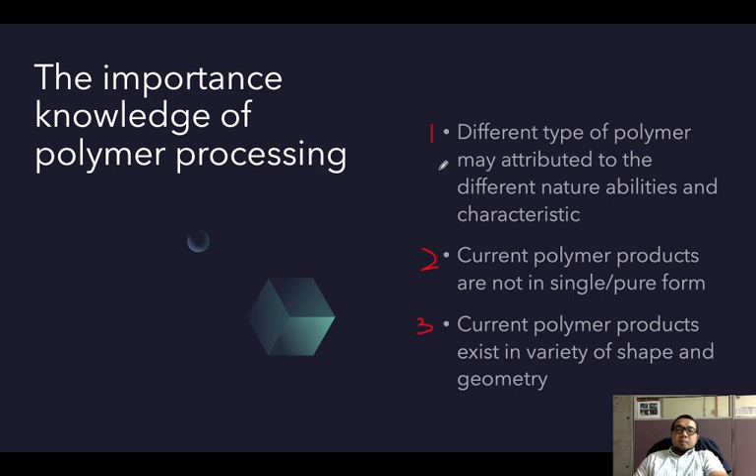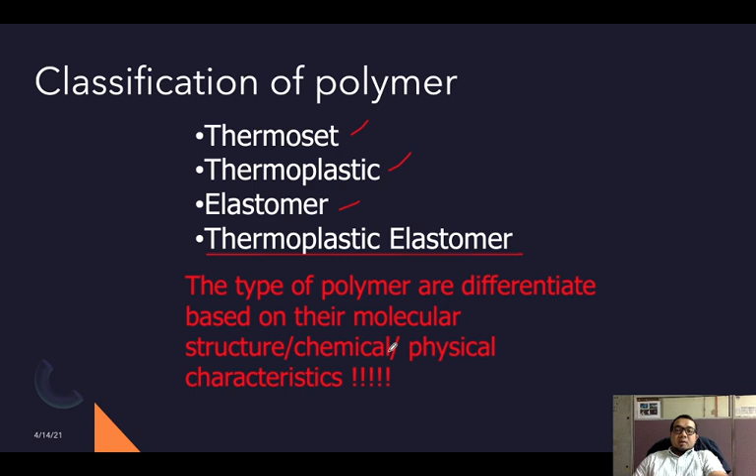So this is the recap. The classification of polymer can be divided basically into three: thermoset, thermoplastic, and elastomer. The thermoplastic elastomer is under the elastomer type. The type of polymer are differentiated based on their molecular structure, chemical, or physical characteristics.

Firstly, we go to the compounding process. Compounding is the process of incorporating additive modifier into polymer for achieving uniformity on a scale appropriate to the quality of the article subsequently made from the compound.

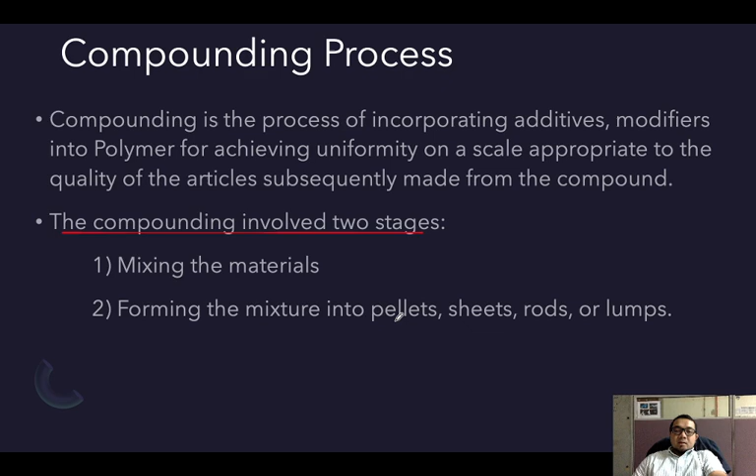The compounding involves two stages. One is mixing the materials. The second one is forming the mixture into pellet, sheet, rod, or lumps.

For the compounding process, there are four basic methods. First is dry mixer, which is ball milling, batch mixer, internal mixer, hot or cold two-roll mill, etc. Continuous mixer, pultrusion and filament winding, screw extruder, single screw or twin screw extruder. This is the basic method for compounding process.

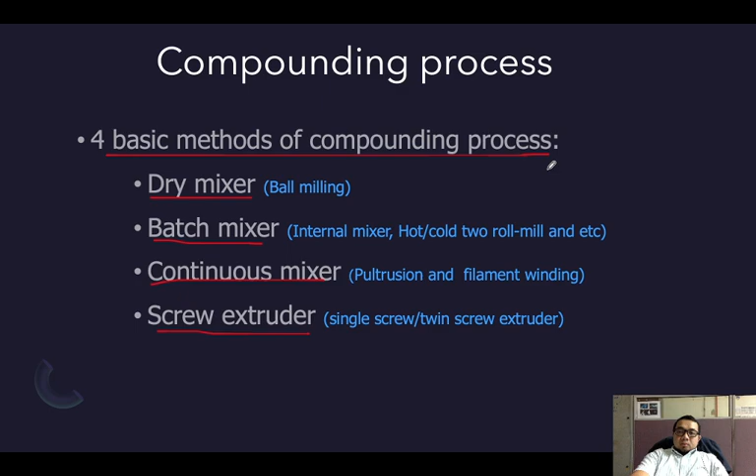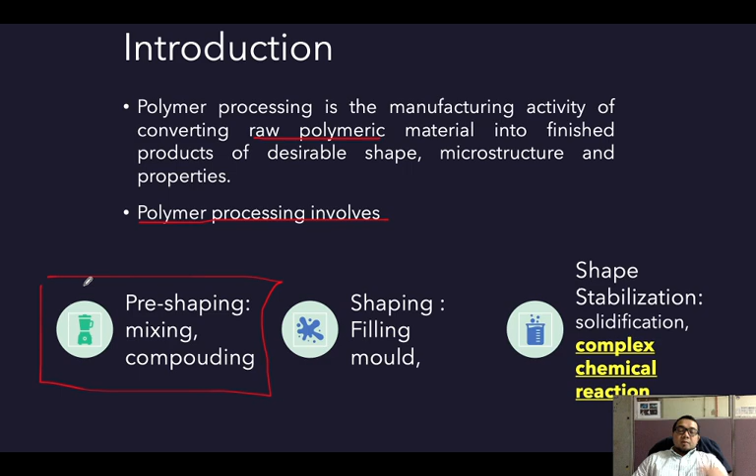Compounding process is more like a mixing process. As I mentioned, this is pre-shaping, the first step, which is mixing and compounding.

For end result and justification, we can get two types of compound specimen: bad compounded specimen and good compounded specimen. Let's look at what is bad compounded specimen, where the mixture is not nice, bad.

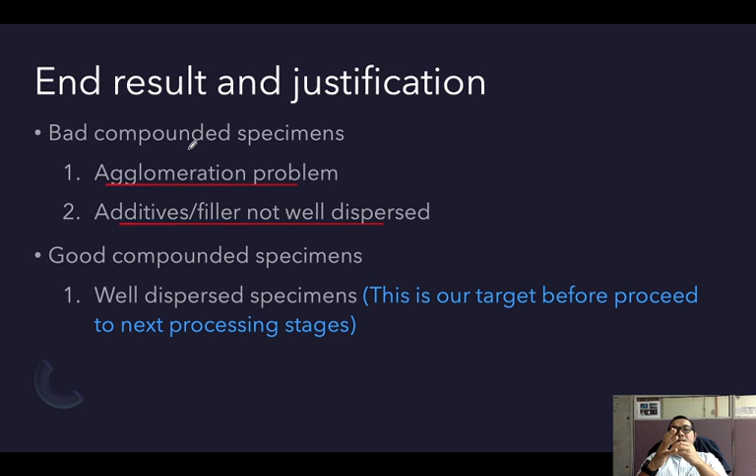First is agglomeration problem, and the second is additive and filler not well dispersed. Agglomeration means you mix two types of material, the matrix which is your polymer, and the filler. The filler becomes clumped, meaning it sits in one place, it agglomerates.

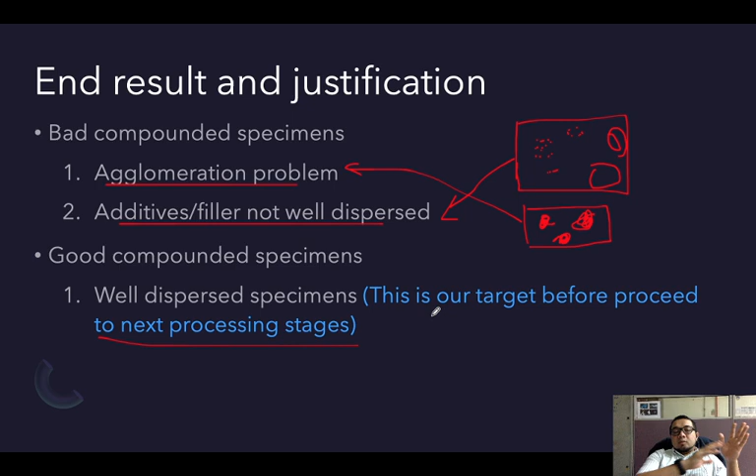And then what's called good compounded specimen is a well dispersed specimen. This is our target before proceeding to the next processing stages. Once we mix well, then we can go to the next process.

For variety of polymer and polymer processing, there are two basic types of polymer: thermoset and thermoplastic. This is a recap from last week. A wide variety of plastic manufacturing processes exist.

First, extrusion, which is expansion, lamination, calendering, solid phase forming, thermal forming, casting, foaming, spinning, molding, compression, transfer molding, blow molding, rotational molding, and also injection molding. These are among the manufacturing processes.

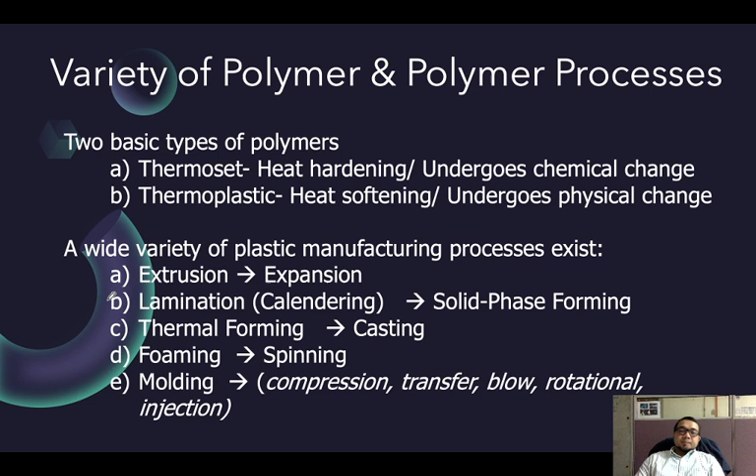So these are the common polymers: ABS, acrylic, cellulosic, nylon 6, polycarbonate, polyethylene high density, polypropylene, polystyrene high impact, PVC polyvinyl chloride rigid.

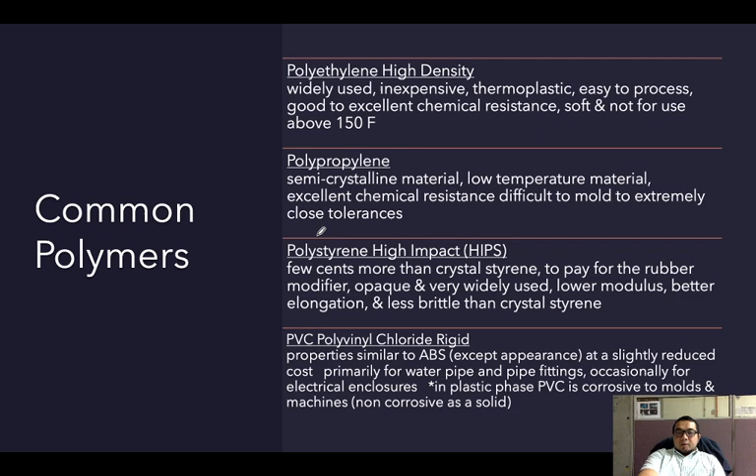Last week's class I already showed the types of material, what is polymer, common polymer, so you can check the justification back. ABS, here are its properties. And then common shaping process for thermoplastic. This can be seen for acetal, ABS, acrylic. This is the common polymer that has been used. So what is the suitable process for this kind of polymer material?

Let's take ABS as an example. For compression molding, it's not suitable. Its common shaping is suitable to be used in injection molding, extrusion, rotational molding, blow molding, thermoforming, foaming, and also calendering. So this is the common polymer I mentioned earlier, and the common shaping process for thermoplastic for this kind of polymer.

Here you can see an example. Say you want to use polystyrene. Let's look here, this is the polystyrene. So what kind of process is suitable to use polystyrene as polymer for the shaping process? If you look here: injection molding, extrusion, rotational molding, blow molding, thermoforming, foam molding, reinforced plastic molding, and also calendering.

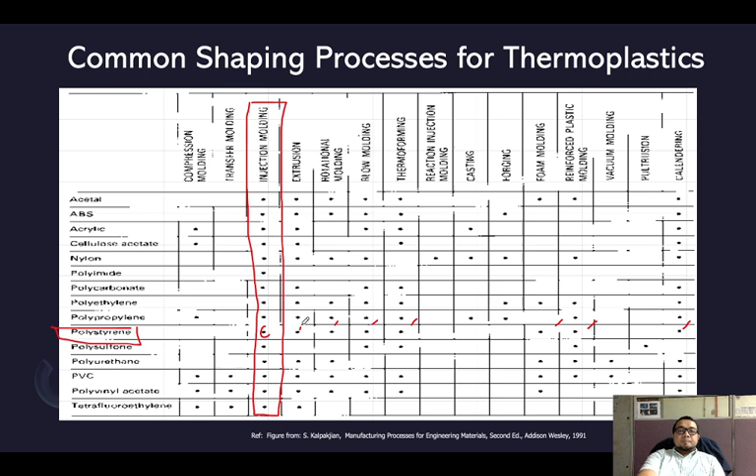And the second one is common shaping process for thermoset. For thermoset we have compression molding, transfer molding, injection molding, rotational molding, thermoforming, reaction injection molding, casting, foam molding, reinforced plastic molding, and also laminating.

If you look at the difference, the processes for thermoplastic are much more compared to thermoset. Let's take an example that's commonly used, which is epoxy and polyester. The process suitable for thermoset is rotational molding, reaction injection molding, casting, foam molding, reinforced plastic molding, and also laminating.

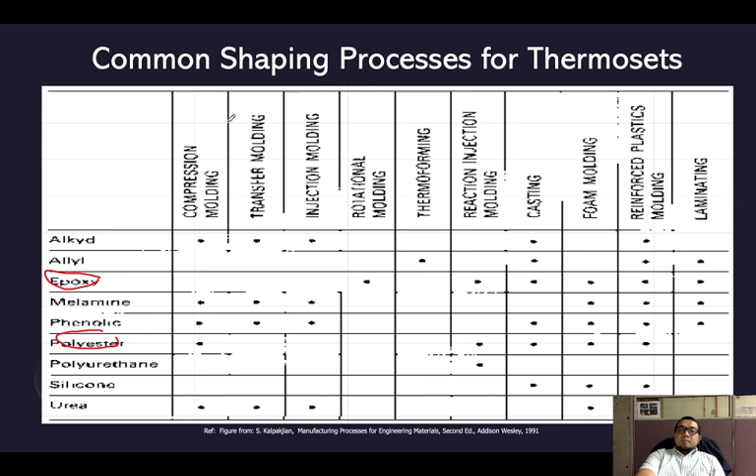So let's go to our topic today, which is compression molding. Compression molding is a processing technique that combines forming the product along with simultaneous curing of the resin by applying pressure and usually heat. So these two things are important.

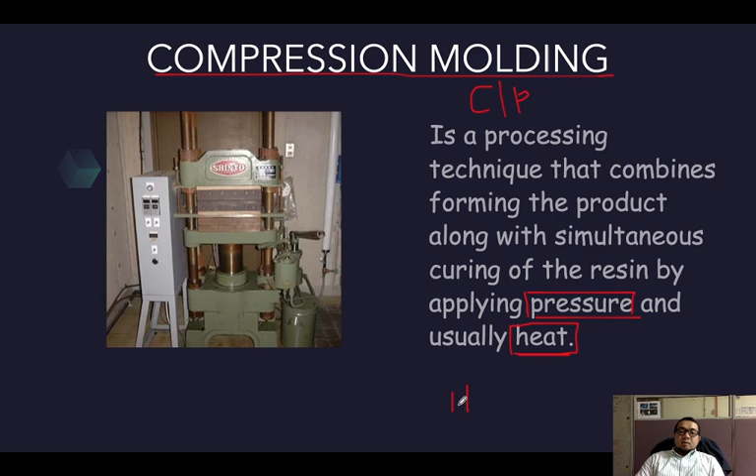There are also processes that only use pressure. In compression molding there are also two types: one HIP, one CIP - hot isostatic pressing and also cold isostatic pressing. There's CIP, there's HIP. That's why it says curing of the resin by applying pressure.

And usually, the word 'usually' is used. This means sometimes the process uses hot isostatic pressing, and sometimes there are processes that apply only pressure, not combined with heat. Basically, for polymer, usually heat is used with pressure.

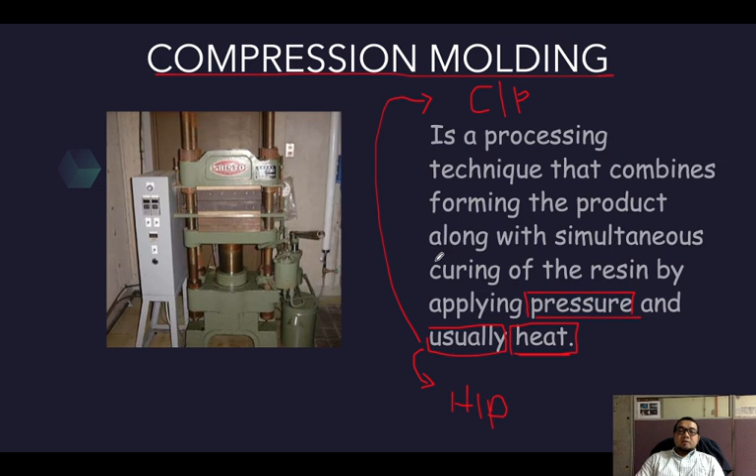So the principle for compression molding has 5 basic steps. One is charging a precise amount of molding compound into the bottom half of a heated mold. The second is closing the mold halves together to compress the charge, forcing it to flow and conform to the shape of the cavity. Third is heating the compound by means of the hot mold and letting it flow completely, filling the mold. The next is cooling, to stabilize the product. And the last part is opening the mold halves and removing the part from the cavity.

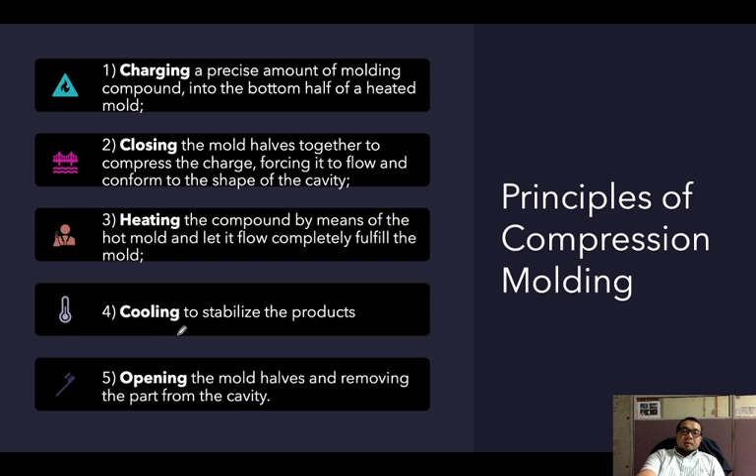Okay, next is preheating of molding compound. In practice, the molding compound, which is powder or dough, is usually preheated before it is put into the mold. So it can be powder or dough. Preheating is usually done with infrared IR heaters, high frequency HF dielectric heating such as microwave oven, radio frequency RF heating, and convection heating in a hot air oven.

So preheating converts the molding compound into uniformly softened material that flows cleanly and evenly when the mold is closed.

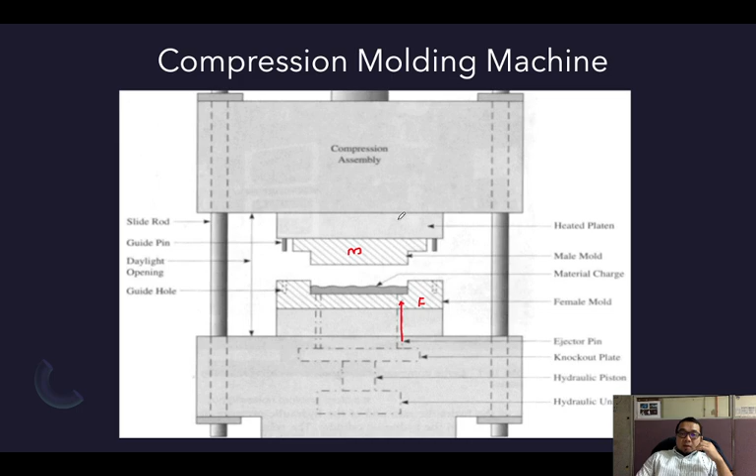From the compression molding, when the mold is closed - upper and lower, male and female mold closed - this is the preheat converting the molding compound. So when it's open, during opening it hasn't melted yet, it hasn't softened the material yet.

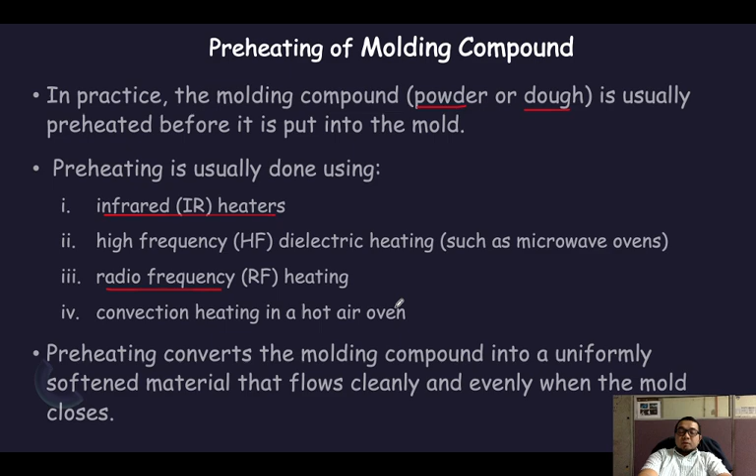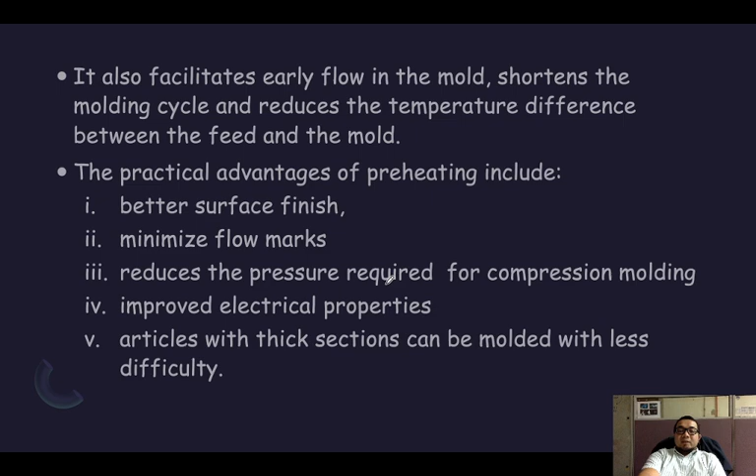It also facilitates early flow in the mold, shortens the molding cycle, and reduces the temperature difference between the feed and the mold. The practical advantages of preheat include better surface finish, minimized flow marks, reduced pressure required for compression molding, improved electrical properties, and articles with thick sections can be molded with less difficulty.

So in compression molding, the workpiece, which is a pre-shaped part, volume of powder, or mixture of liquid resin and filler, is placed in the heated mold and is formed under pressure. So from the first figure, which is charge is loaded, this is the charge, which is your material. This is the cavity, punch, upper mold and lower mold. This is the knockout pin.

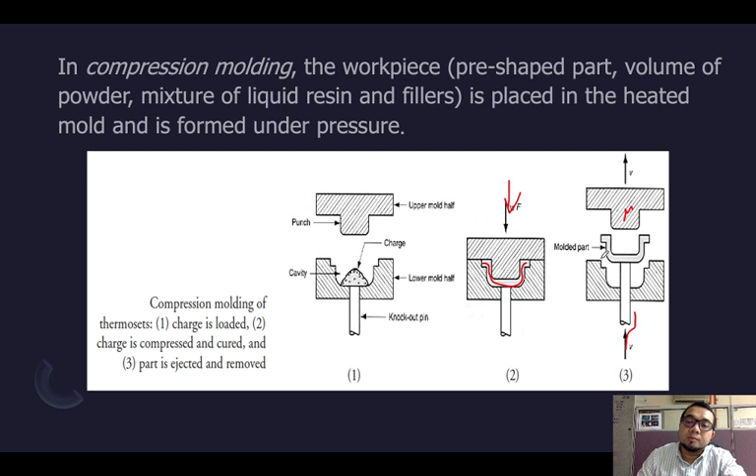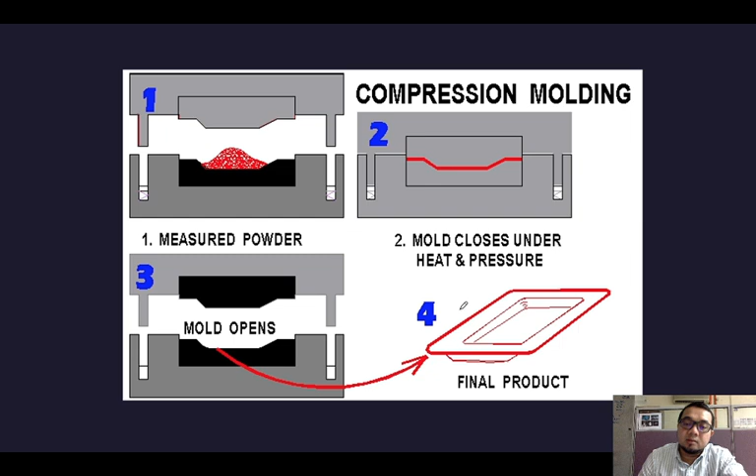So this is a basic illustration for compression molding. The first figure is measured powder. Second one is mold closed under heat and pressure, and then eject, mold open, and you get the final product. So this is the parameter that you should consider during the process of compression molding. The quantity of charged molding materials put into the mold. The second one is pressure of the molding process. Usually the range of pressure is around 2000 to 3000 psi, which is 13.8 to 20.7 megapascal.

So the third one is mold temperature. The temperature range should be around 300 degrees Fahrenheit to 375 Fahrenheit. So basically mold temperature also depends on what material you use at that time. And then the last one is cure time variable. Cure time variable is the period required to harden thermosetting material to partial and complete polymerization, called cure time. So this is the curing for the polymer.

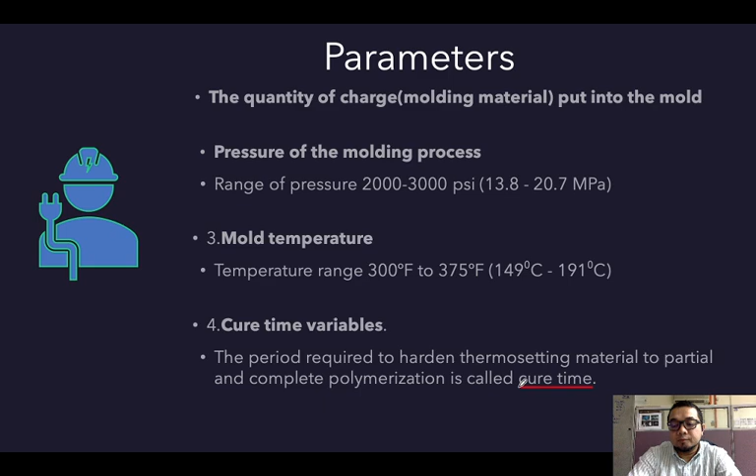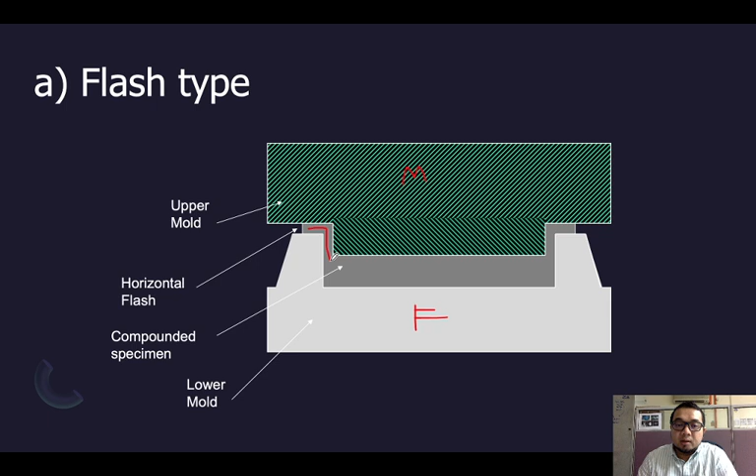So flash type is a mold in which the mold faces are perpendicular, normal to the clamping action of the press, so that the higher the clamping force, the tighter the mold seam. It is the simplified version of semi-positive mold. The flash forms the seal as it spews and rapidly cures at the mold parting line. It is the least expensive of the compression molds. The greatest disadvantage to a flash mold is that there is no restriction to the flow of material and no back pressure is built up in the molded part.

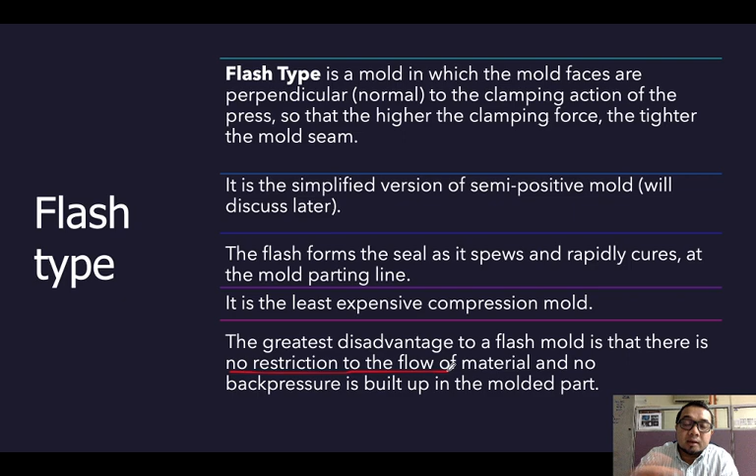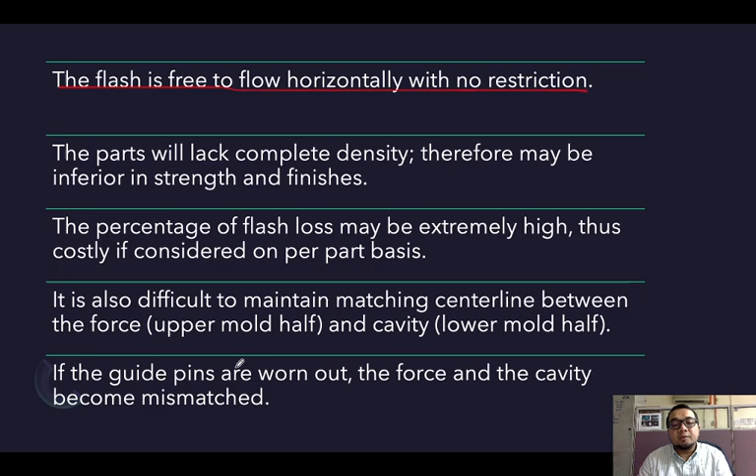So the part will lack complete density, therefore may be inferior in strength and finish. The percentage of flash loss may be extremely high, thus costly if considered on a per-part basis. It is also difficult to maintain a matching center line between the force, upper mold half, and cavity, lower mold half. If the guide pins are worn out, the force and the cavity become mismatched.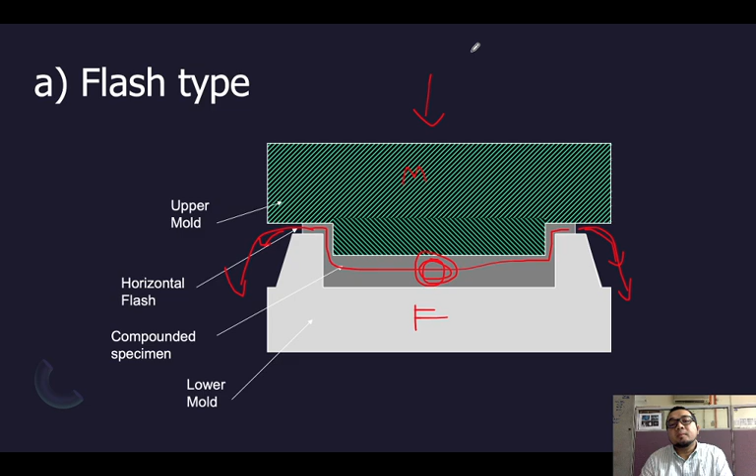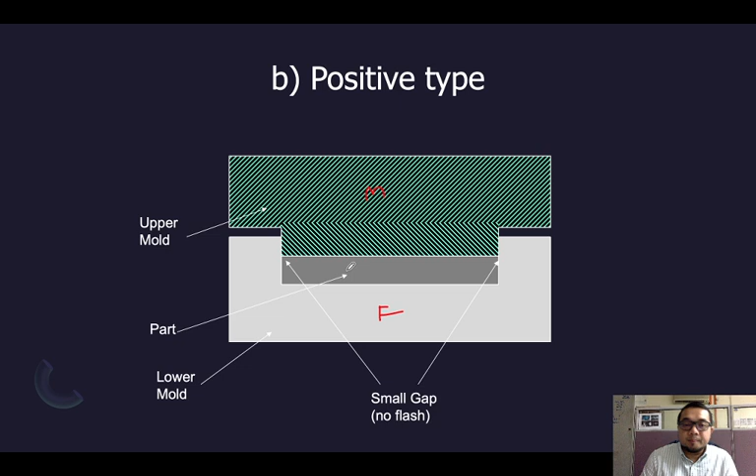Then the second type of mold is positive type. Same as well, this is the male mold, upper mold, and female mold at the lower. So this is the part, or your materials. This is the small gap.

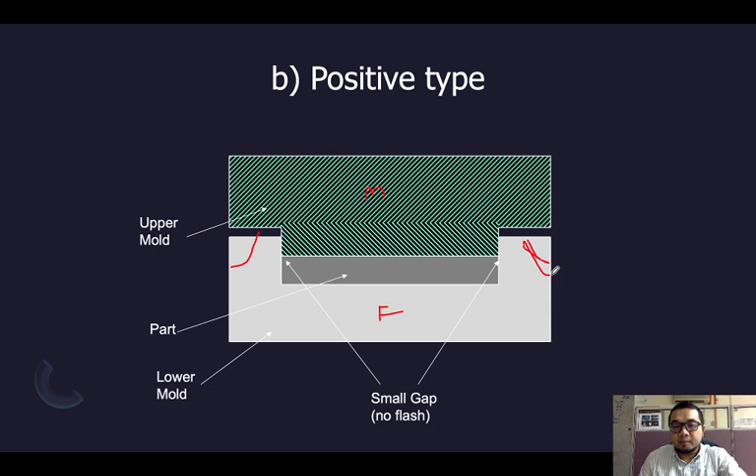So for positive type, it is a mold designed to trap all the molding material when it closes. Maksudnya dekat sini bila dia tekan, dia dah tak boleh nak access keluar. Dia dah tak ada flash. Maksudnya tak ada lebihan. Excessive flash tu dah tak ada. So positive mold takes all the applied pressure. There is insufficient clearance to allow material to escape.

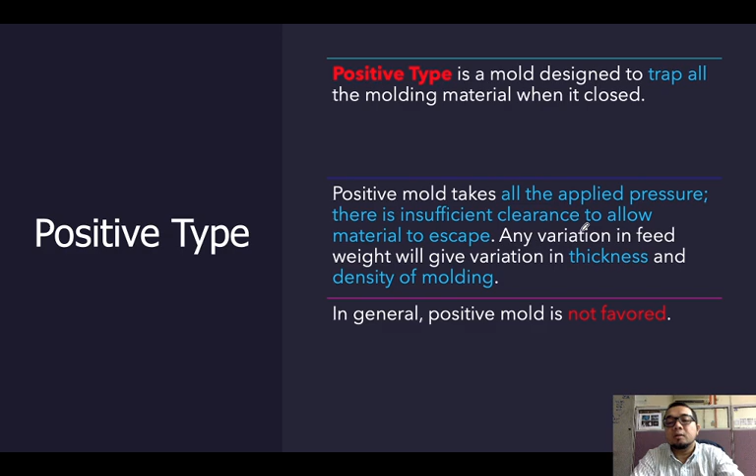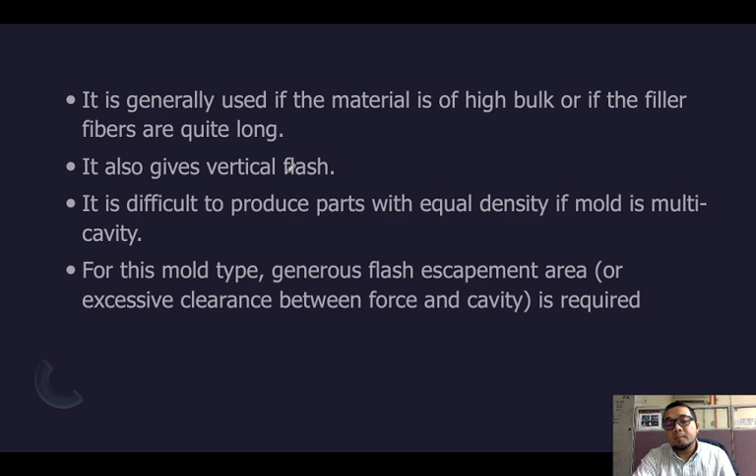Any variation in feed weight will give variation in thickness and density of molding. In general, positive mold is not favored. It is generally used if the material is of high bulk or if the filler fibers are quite long. It also gives vertical flash. It is difficult to produce parts with equal density if the mold is multi-cavity. For this mold type, generous flash escapement area or excessive clearance between force and cavity is required. So dia tak boleh nak keluar, but it will become another problem for the positive mold.

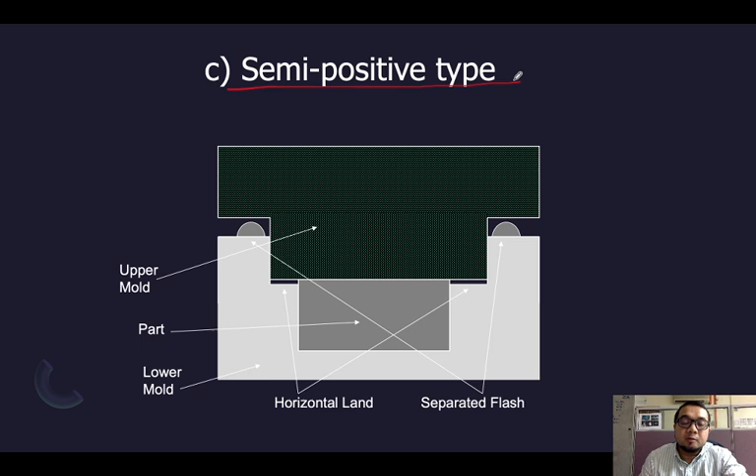Then this is the semi-positive type. The last type of mold is semi-positive. Upper mold, lower mold, this is your part. Kat sini yang membezakan dia ada horizontal land sikit, baru dia ada excessive. Yang ni separated flash. Berbeza dengan yang flash type tadi, dia terus keluar kat sini.

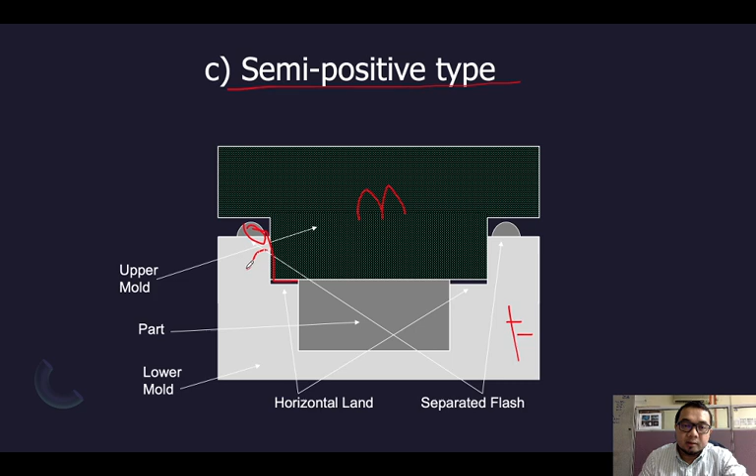So semi-positive type is a mold whose principle is, as the two halves of the mold begin to close, the mold acts much like a flash mold, as the excess material is allowed to escape during loose fitting plunger and cavity. This one, this is the plunger. So as the plunger goes further into the cavity, the mold becomes a positive mold with very little clearance, and full pressure is exerted on the material, producing a part of maximum density.

This type of mold takes advantage of the free flow of material in a flash mold and the quality of producing dense parts in the positive mold. So the majority of compression molds are semi-positive horizontal flash molds. Kebanyakan mold yang digunakan untuk compression adalah semi-positive type.

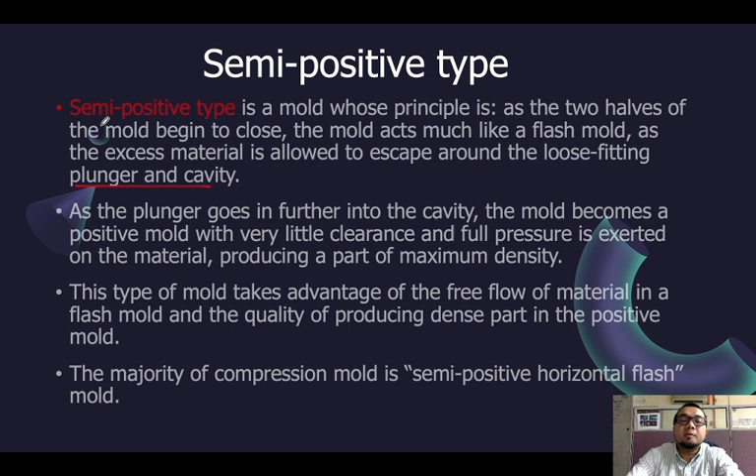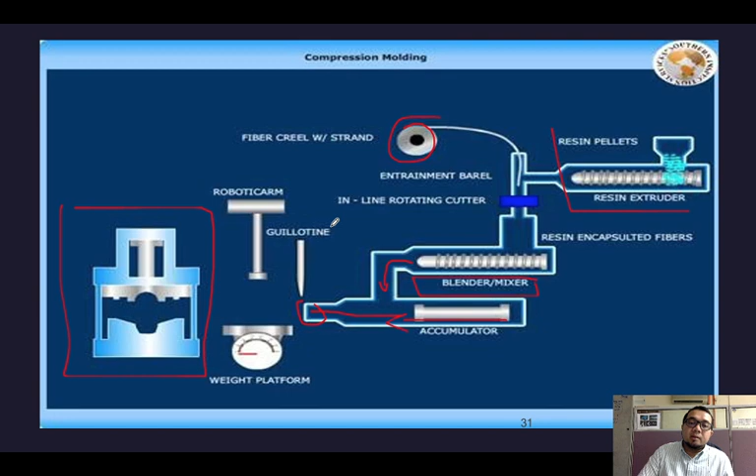And then for compression molded parts, the total force needed per part is determined by projected area A, required cavity pressure for the resin PA, pressure factor that accounts for depth ρ, and depth in excess of the minimum amount, which is dE. So this is to calculate the total force that is needed for the part for compression molding.

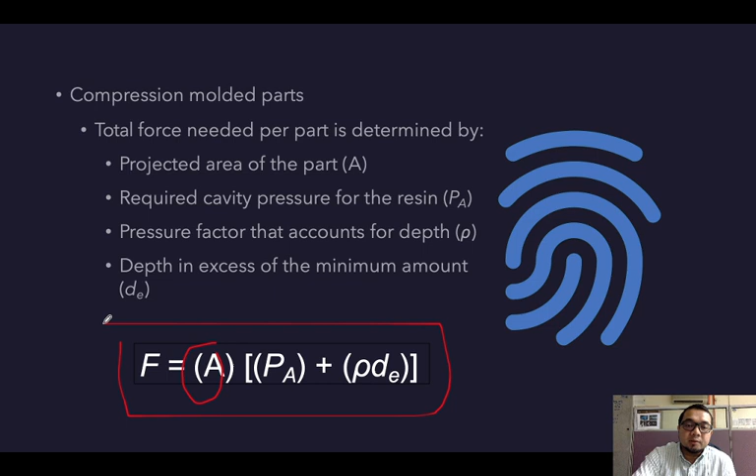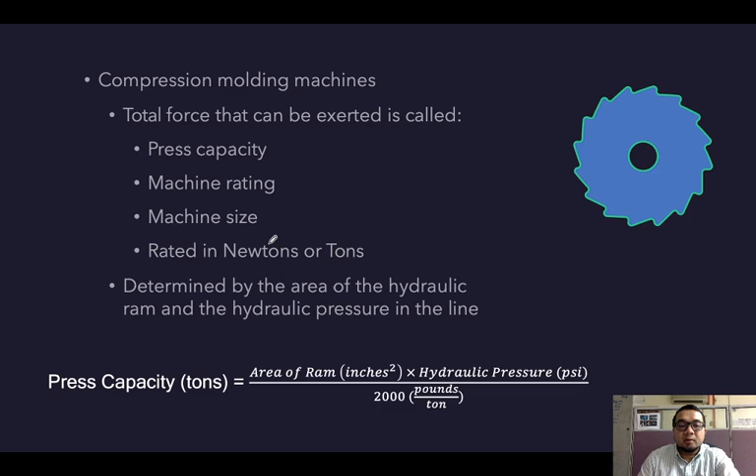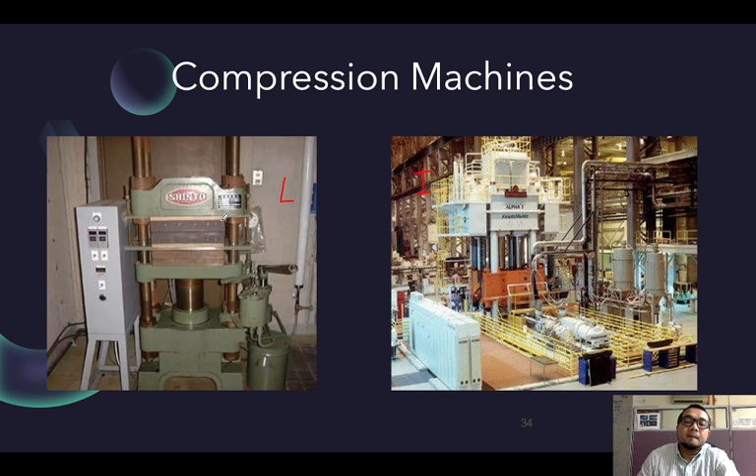Then for the compression molding machine, the total force that can be exerted is called press capacity. Machine rating: machine size is rated in Newtons or tons, determined by the area of the hydraulic ram and the hydraulic pressure in the line. So these are two types of compression machine. One is lab scale and the second one is industry scale. Nampak beza kecil dengan besar.

So this is compression molding versus injection molding, the difference between them. First, heated mold. All plastic materials can be used. Long cycle times, in minutes. Can't recycle flash or waste parts. Low part complexity, no undercut. No sprue or runner. Sprue and runner we mostly use in casting; excessive flash or material will go out at the sprue. So reinforcement material can be long. Maksudnya dia boleh guna pakai fiber, continuous fiber.

For injection molding, which is a cooled mold, thermoplastic material. The difference is injection molding only uses thermoplastic, but compression molding can use all plastic materials. Injection molding has short cycle times, only seconds, compared to compression molding's minutes. Injection molding can reprocess flash and waste parts, which compression molding cannot. Injection molding has high part complexity, undercuts are possible, uses sprue and runner, some reinforcement material is possible but must be short. Injection molding cannot use long fiber.

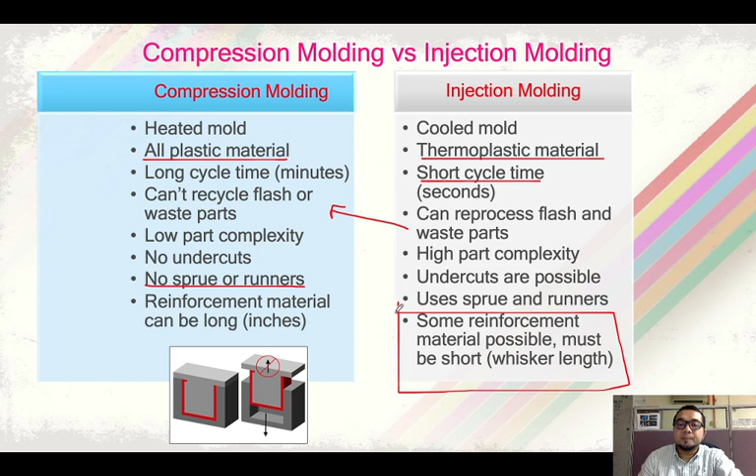So the space for loading the molding compound is large to minimize flash. The flash escapement area is located on the force side for easy removal. This type of mold produces parts having maximum physical strength.

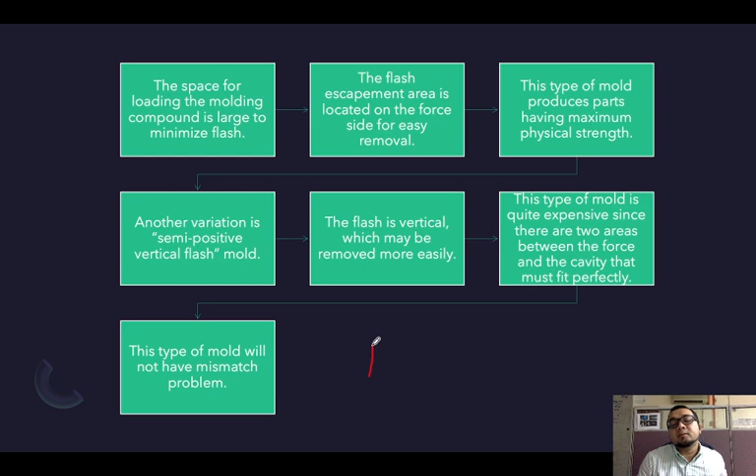Another variation is semi-positive vertical flash. The flash is vertical, which may be removed more easily. This type of mold is quite expensive, since there are two areas between the force and the cavity that must fit perfectly. This type of mold will not have mismatch problems. So this is the last type of mold that I have explained earlier, which is semi-positive flash mold.

So there are 4 aspects that you should consider in the compression molding process. Firstly is the proper amount of the material to fill the cavity when the mold halves are closed.

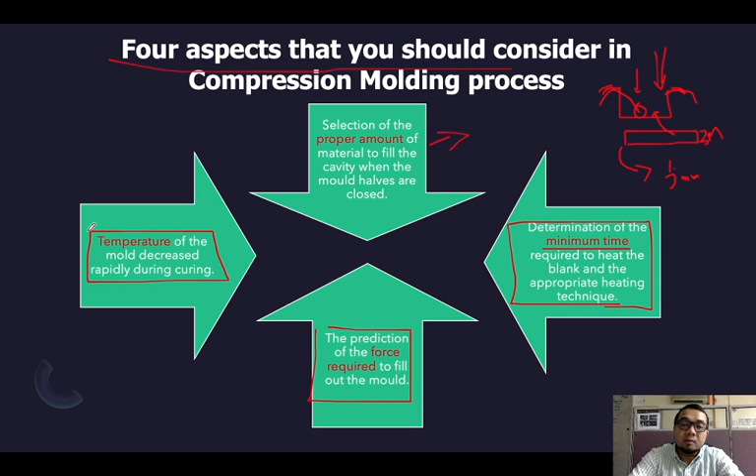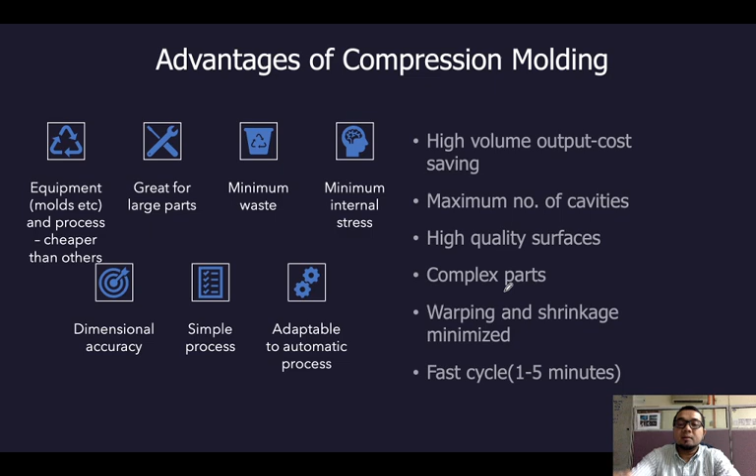So minimum internal stress, adaptable to automatic process, which is simple process, dimensional accuracy, because you compress according to your mold. So high volume output, which is cost saving, maximum number of cavities, high quality surface, complex parts, warping and shrinkage minimized, fast cycle 1 to 5 minutes.

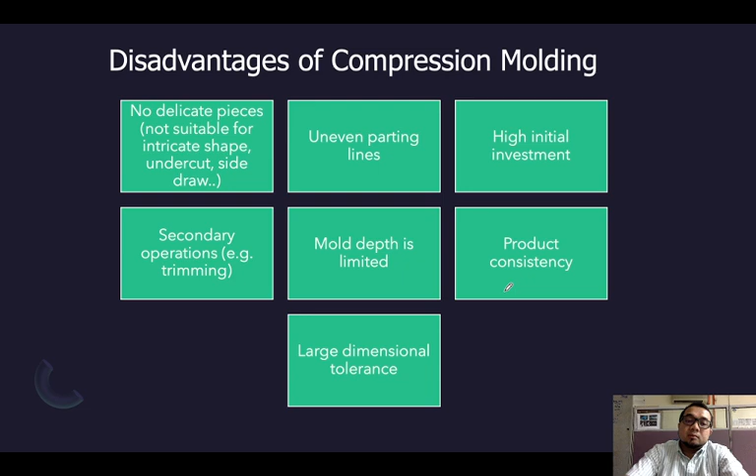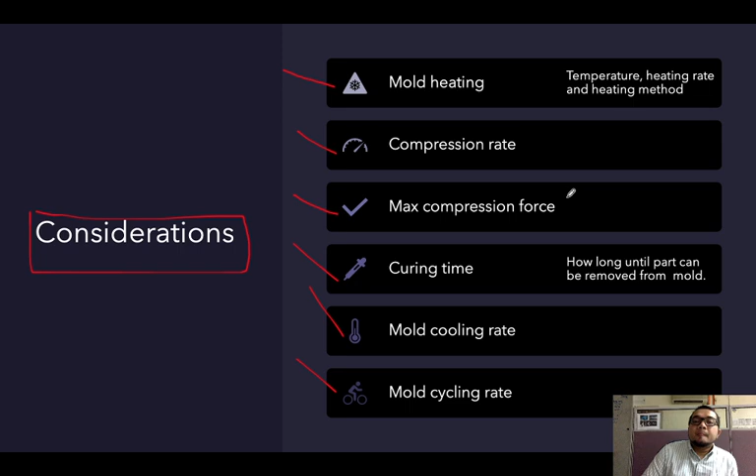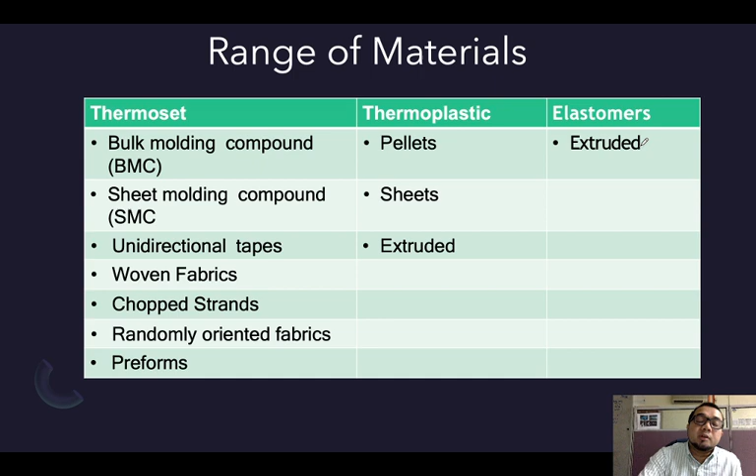So this is the range of material that can be used for compression. Thermoset, mostly bulk molding compound (BMC), sheet molding compound (SMC), unidirectional tapes, woven fabric, chopped strand, randomly oriented fabric, and preform. For the thermoplastic, which is pellets, sheets, and extruded. And for the elastomer, which is extruded material that can be used for compression molding.

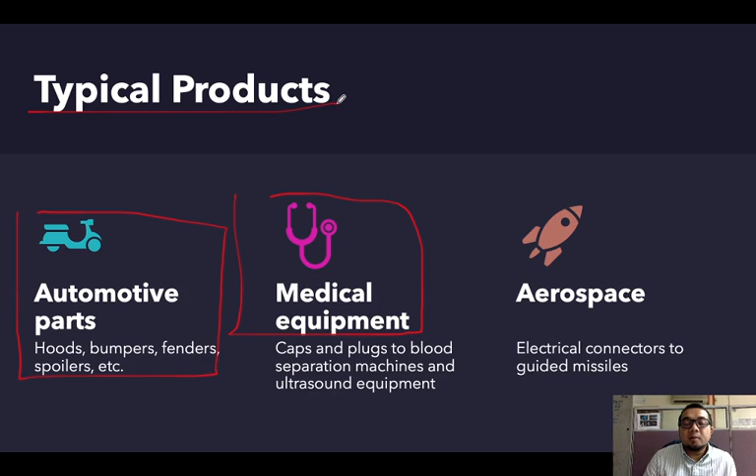So these are the typical products from compression molding, which is first automotive parts for vehicles: hoods, bumpers, fenders, spoilers, etc. And the second one is medical equipment, caps and plugs to blood separation machines and ultrasound equipment. For aerospace, electrical connectors to guided missiles. These are typical products; the list would be too long otherwise.

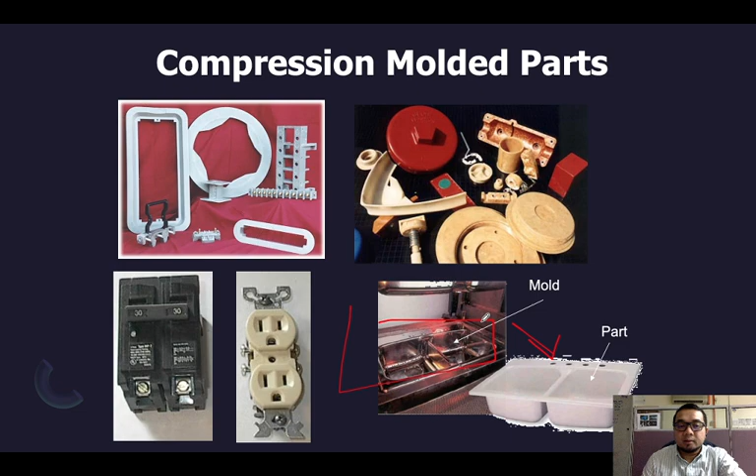So this is also the common compression molded part. This is the mold, and this is the final product, for the automotive ones, bumper, fender. And then this is the rubber compression. Same, this is your mold, and then this is the final product. So it depends on your mold. Whatever shape you want, it all depends on your mold.